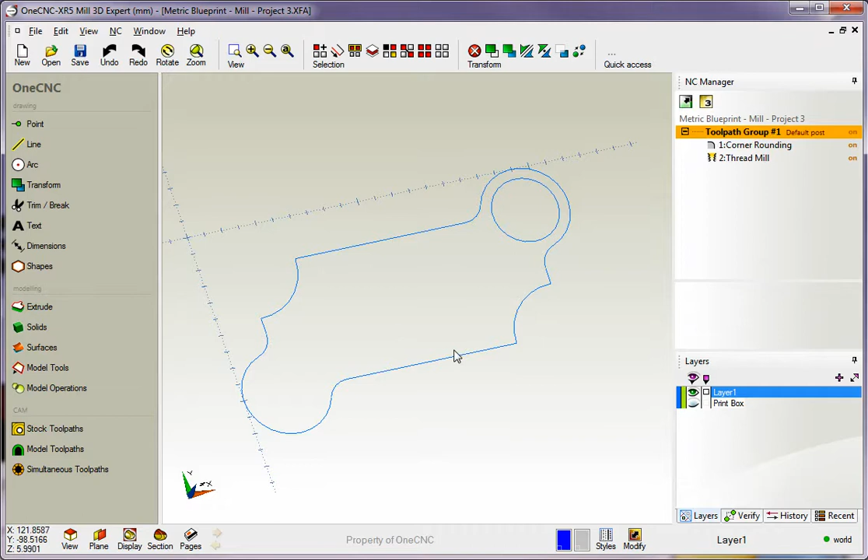I'm going to head over to the main toolbar and select the text command, the very first option, left-hand mouse click on that. First, type in the text you'd like to create. I'm going to type in XR5. That looks good. You've got justification control here if you have multiple lines of text, but we just have one line, so it's not a big deal. We do want to select font attributes.

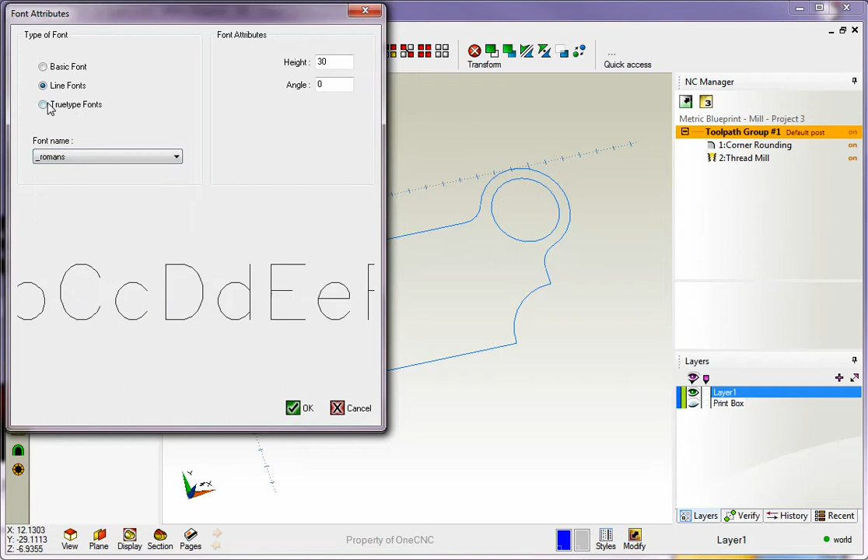Notice there's three different font styles you can choose from: a basic font and line fonts. These two are actually line fonts. If you select the basic font, that's really standard. If you go with line fonts, you'll notice there are some different options you can select from. But this is a nice one down here, TrueType fonts. This will let you choose any type of TrueType font currently installed on your computer.

I'm using Arial Black for this, and for height, I'm going to make this 25 millimeters. Then, of course, you can select bold, italic, and so on. I'm going to go with bold and click OK. And we're finished, so I'll click OK.

Then you just simply take your cursor and left-hand mouse click where you want to place the text. Now, if you're not going to machine this, then you're finished. If you're just going to use this for a print or for display purposes, you're done.

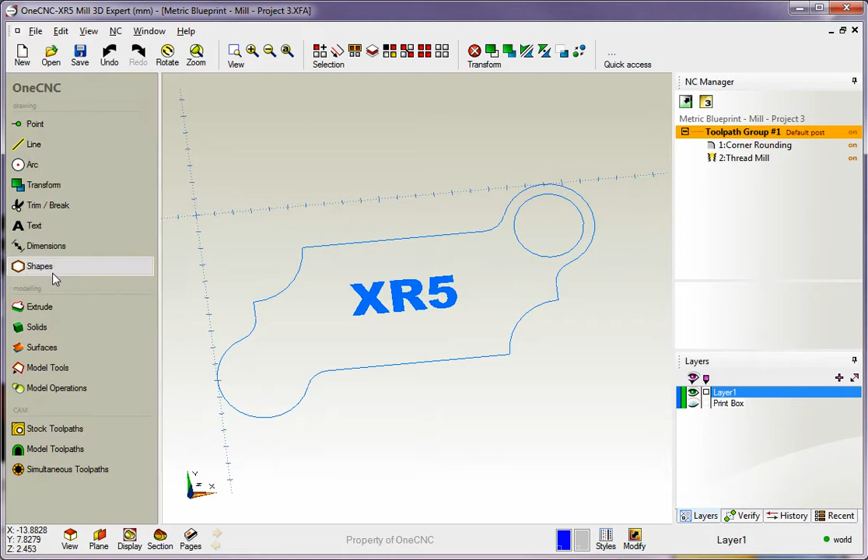But if you want to machine this, you do want to convert this text into lines and arcs. The way to do that is to come back to the main toolbar - I'm already inside our text category, so I've already selected text, which is right here. Instead of selecting this option, you want to now go with text to geometry. Just simply take your cursor and left-hand mouse click, and it will convert that to lines and arcs. Okay, and that looks great.

Now to machine this, it's really up to you. If you want to, you could, from your stock toolpaths, perform a pocketing operation on each one of these. If you'd like, you could profile each one of these shapes. Now, if you want to take the center of the tool and drive it on the geometry, that's what we call engraving, and we have a whole category for that.

There's the cut chain options. These allow you to engrave, but it will only allow you to engrave one shape at a time. There's a 2D option and also a 3D option for this. And then we have Engrave All, which is also 2D and 3D. Engrave All is nice in that it will engrave everything on the screen.

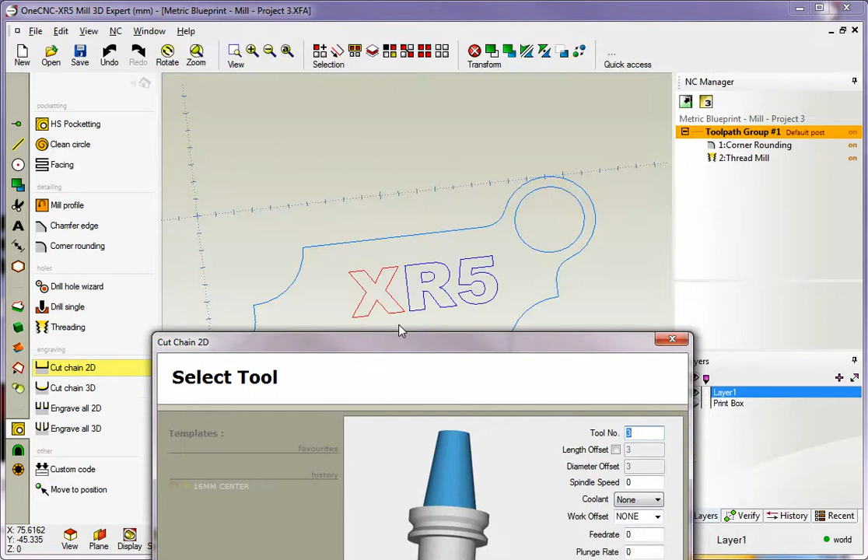Let's first demonstrate cut chain. I'm going to select that, and we're going to select the shape that we want to cut. You can go either direction - since we're engraving, I'll go that direction, then hit F3 to select the rest of the geometry. Notice that as soon as I select that, instantly we're going into Select Tool. So remember, the cut chain options only allow you to machine or engrave one shape at a time. For the tool, I think what I'm going to use is just a chamfer tool. That looks good.

And for diameter, I'm going to put in 12 millimeters for that. The tip diameter I have at 0, and then we have the taper angle I have set there at 45 degrees. We'll say that's tool number 3, and for spindle speed, I'll kick that up to 3,400 RPM. And for feed rate, I'll put in 0.25. All that looks good. Clearance, I've got 10 millimeters.

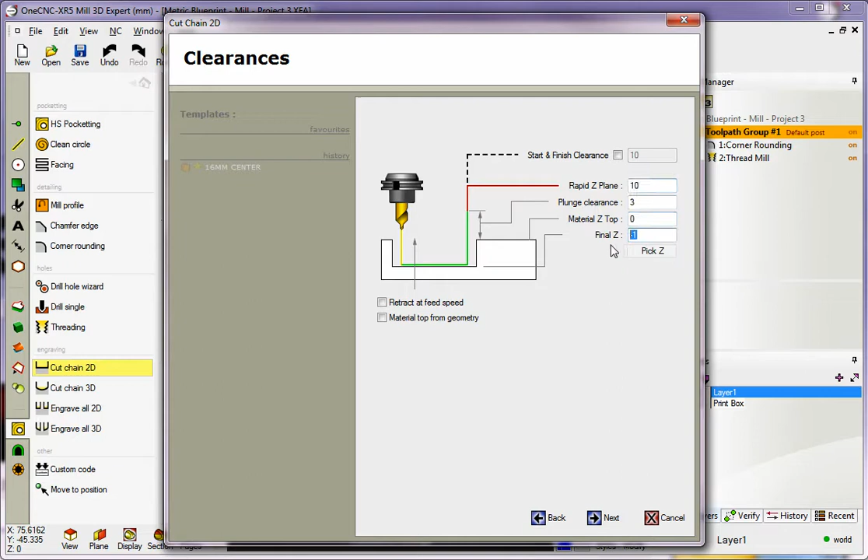For plunge clearance, where we're going to start to feed down, I have 3 millimeters. The top of the material is 0. And for depth, I'm going to machine, you know what, -1 is fine. So we'll go with -1 millimeter on that. Click Next.

And then, of course, you've got a couple styles here. You can ramp, cut. You can use cut levels, which will cut just one cut depth per level and then move down, or you can just go with none. I'm just going to go with none because I want to take this just in one pass. All right, and so there you go. There is the engraving, the letter X on there.

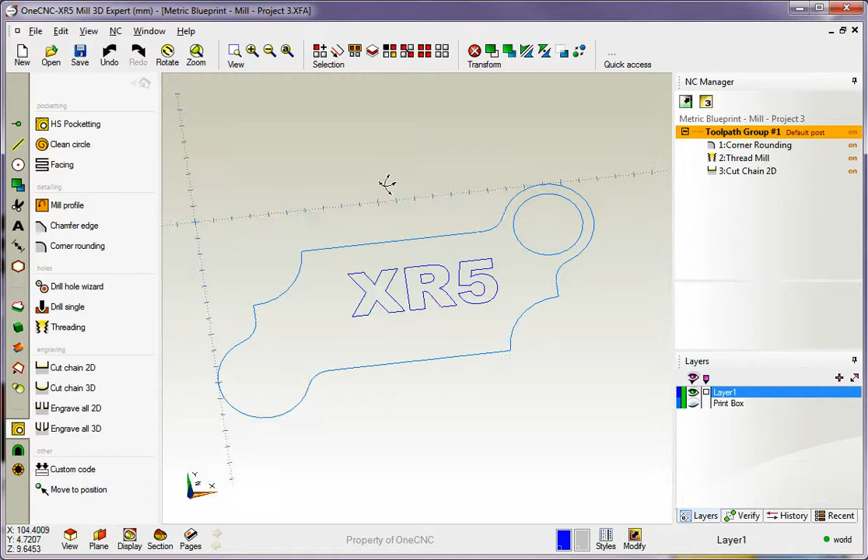Now let's take a look at Engrave All. Engrave All is going to engrave everything on the screen. So what we might do is this. Let's temporarily hide the geometry that we don't want to engrave. So I'm going to use our Select Chain tool. It doesn't matter which direction we go. I'll hit F3, and I'm going to grab that guy there. That looks good, and we're finished selecting, so I'm going to right-hand mouse click.

Now the reason why I selected that geometry is I'd like to temporarily hide that. And you can do that very easily within OneCNC using the blank tool. Now the blank tool is located up here. That will currently hide the selected geometry, or you can simply just hit the letter B, like blank or bravo, on your keyboard. And by doing so, it'll hide that. Now we can hop down here to Engrave All.

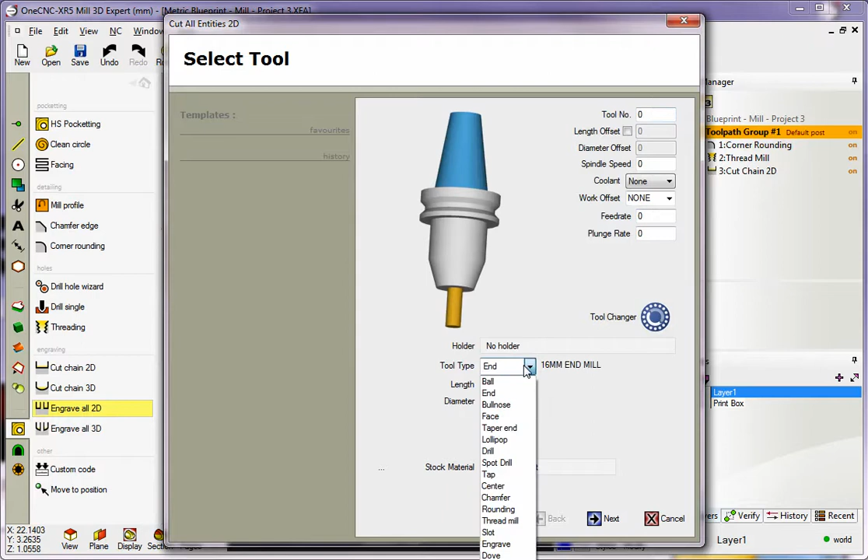And same thing, I think I'll use the same type of tool that we did before, and that was a chamfer tool. That looks good. I believe the diameter I used was 12 millimeters. Tip diameter 0, taper angle 45. We'll say that's in turret position number 3, and put our RPM in here. I'll give it some coolant this time, which I should have done last time. And here's a feed rate.

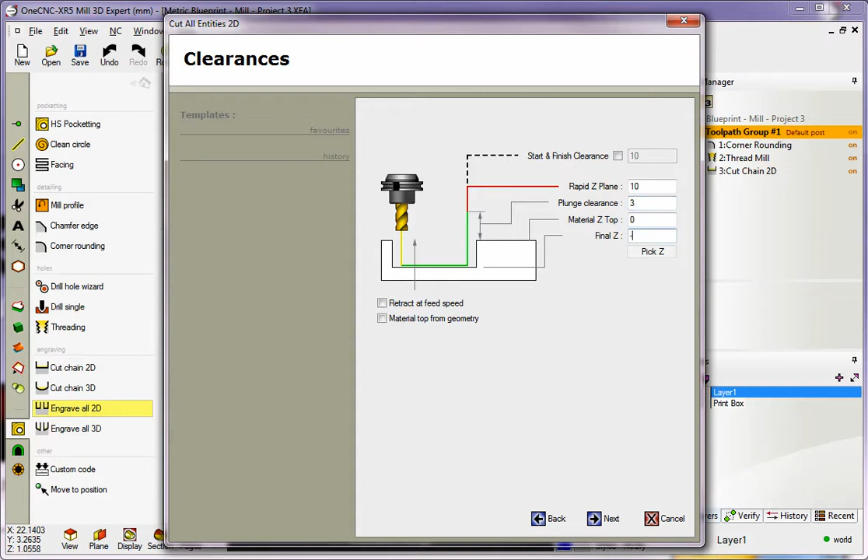That looks good. We'll make this 10 millimeters for the rapid Z plane. The plunge clearance, this is where the tool is going to start to feed down, and then here's our depth. I'll put in -1 for that. So we'll click next, and again you have a toolpath style to select from. I'm just going to take this in one pass. I don't need to take depths of cut, so I'm going to say none to this. We'll click finish, and there you go.

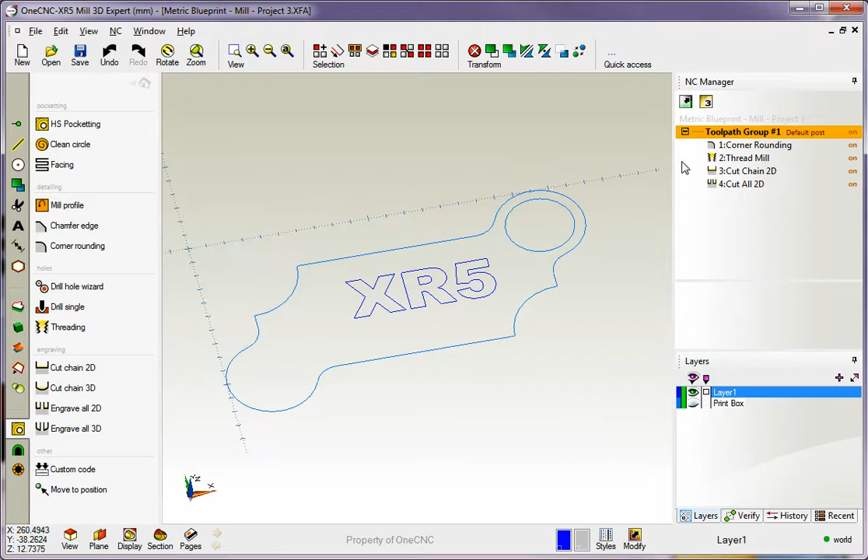Why don't we take a look at that really quick? I'm going to bring this geometry back, and why don't we simulate this? I'll right hand mouse click this, and we'll go with simulate, and I'm going to pick a boundary. I'll just pick this outside shape for our stock. All this looks good, so I'm just going to left hand mouse click the boundary and then right hand mouse click, and then here's our engraving.

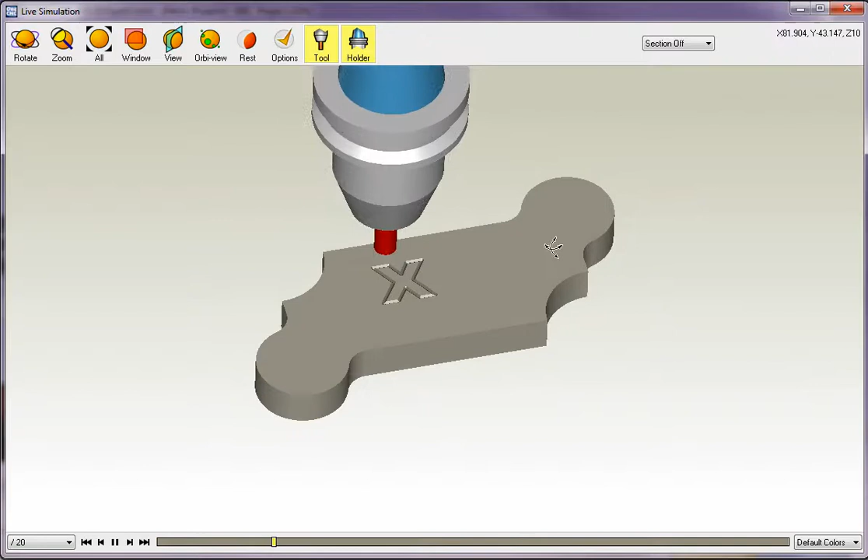Very, very easy to do. I'll speed this up just a little bit, and there's our XR5.